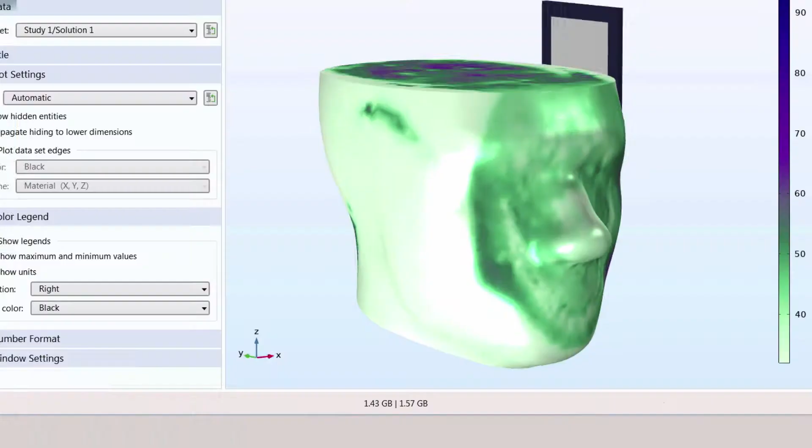Simulation software is growing more important in the design of products, especially in the biomedical industry, because of three reasons: the need to handle multiphysics problems, the need to replace or augment costly or difficult experiments, and the need to solve novel problems.

What we mean by solving novel problems is, in biomedical engineering for example, it's a combination of solving for physics but also accounting for the biology. How do you model healing? Engineers are used to just modeling damage, for example, but then bodies heal. How do you model that? As a biomedical engineer or practitioner, you might have to bring in new equations to handle this, and do you have tools to take that and couple it with the existing physics?

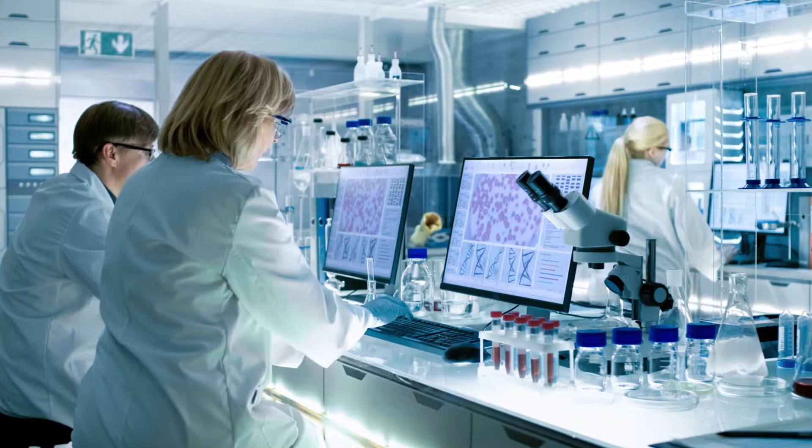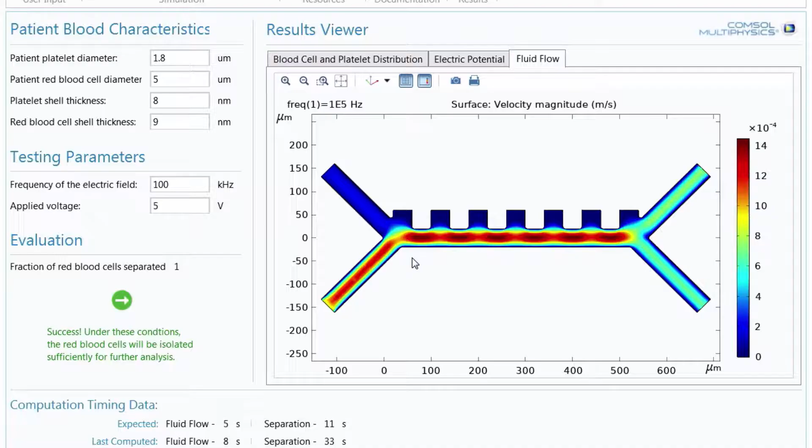Simulation has two functions really. One is to help the design effort set parameters up for optimizing a design and understanding what's going on. When I deal with development engineers in the lab, it also enables them to investigate what's going on in places they can't go. A lot of what comes out is animations of what's going on with flow or heat or other physical phenomena, and they can use that to present to their management. It's a very clear way of showing what's going on, and it's a really valuable tool.

Simulation software makes communications between different engineers, different specializations within engineering, easier, as well as making it possible to effectively communicate between engineers and non-engineers. Simulation makes communication with non-engineers more clear.

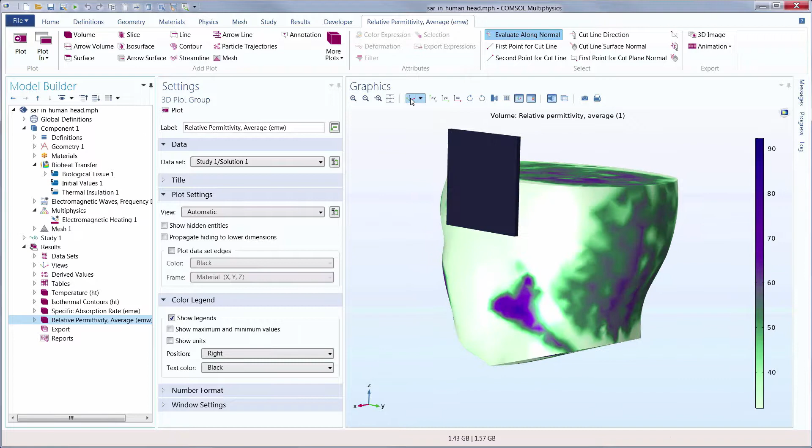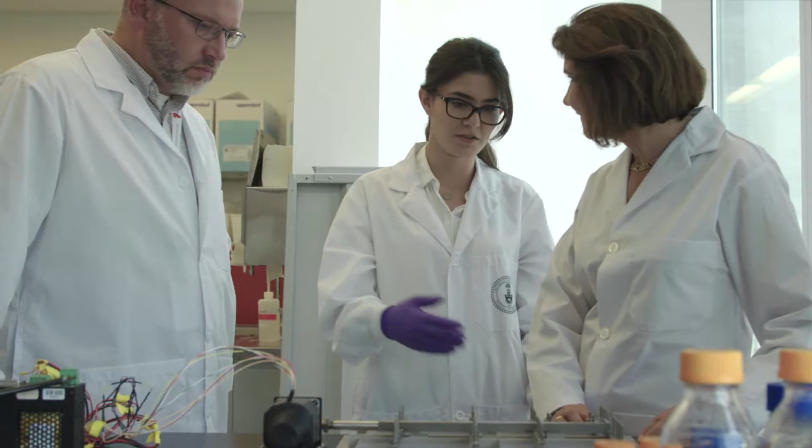Communication with non-engineers is essential, and the role where we come in is the initial prototyping and design. That involves having to understand the basic technology from the scientist or clinician that initially develops it, and then develop that into something that's going to bridge over to manufacturing. Engineers might be interested in looking at physics quantities, whereas a clinical practitioner might be interested in more physiologically meaningful quantities. So an engineer who builds products, say a software product for a non-engineer, ideally would want to take this and wrap it into an interface that is accessible to non-engineers.

And over the last few years, COMSOL has been developing tools to help engineers do just that.

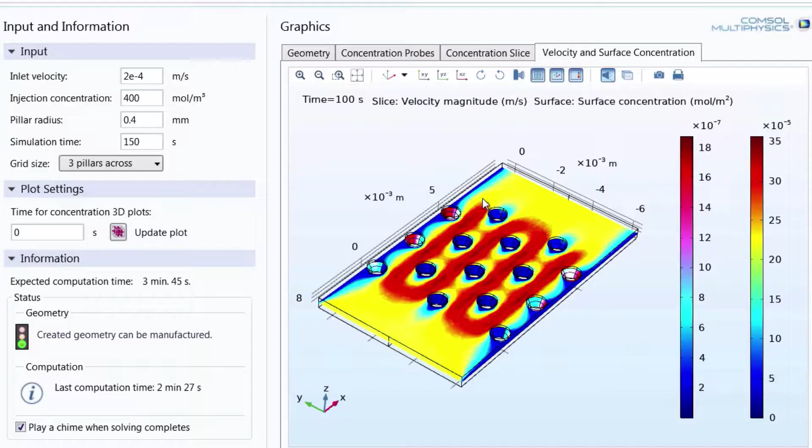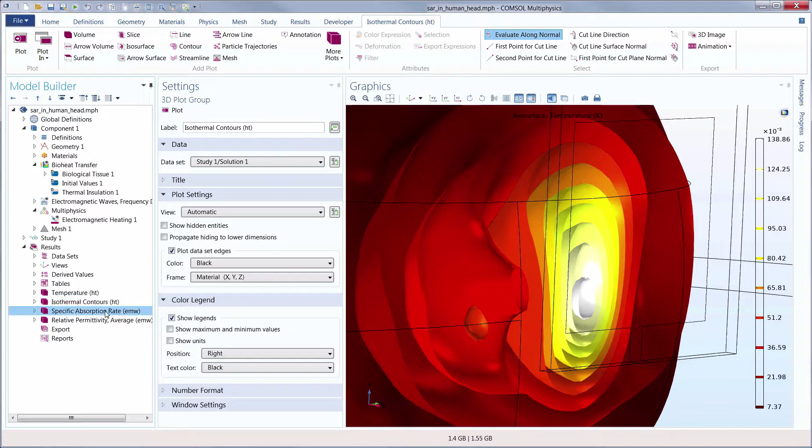The top benefits of using simulation tools for engineers is, one, saving on time and money. Experiments are difficult and expensive, so hopefully you want to augment them. The other is to do design optimization. You can go through a lot of iterations, or also iterations you might not have come up with, by posing the problem as a mathematical optimization problem and asking the software to look for best case and worst case scenarios.

It also increases creativity. If you did the wrong thing in a simulation which increases your temperature, you're not going to burn anything, right? You will just see a large value in a plot. But you would have learned from that, so it takes away that fear of 'what if I did this wrong?' No, you'll just learn that you did things wrong. And that's very empowering and liberating.